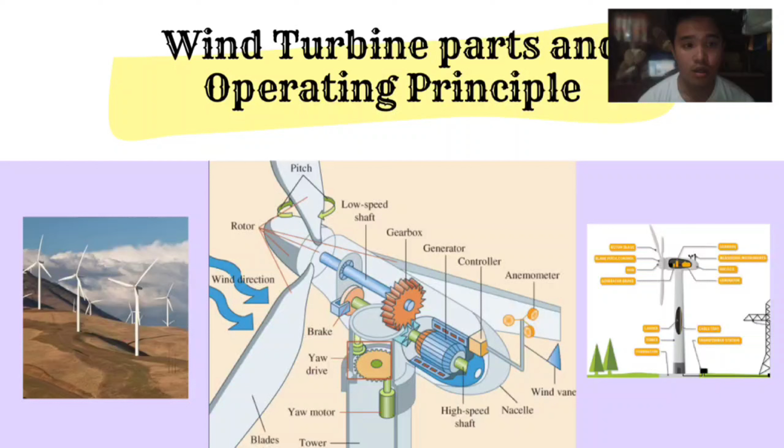And so that we can better understand the functionality and the proper arrangement of our parts in the wind turbine, it will be discussed by my co-members.

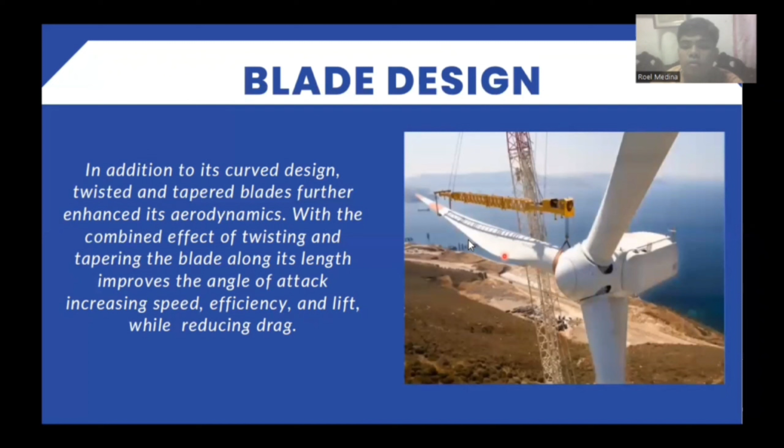Blade aerodynamics. Wind turbine blades work by generating two aerodynamic forces: lift and drag. This is due to the wind and their airfoils. The lift force is perpendicular to the airflow and is in line with the blade rotation. While on the other hand, the drag force is in the line of apparent wind direction, which means it opposes the wind direction or the blade motion. And the drag increases in proportion to the frontal area of an object facing the wind.

And both of these arise from the difference in air pressure across the two sides of the blade, which creates both lift and drag.

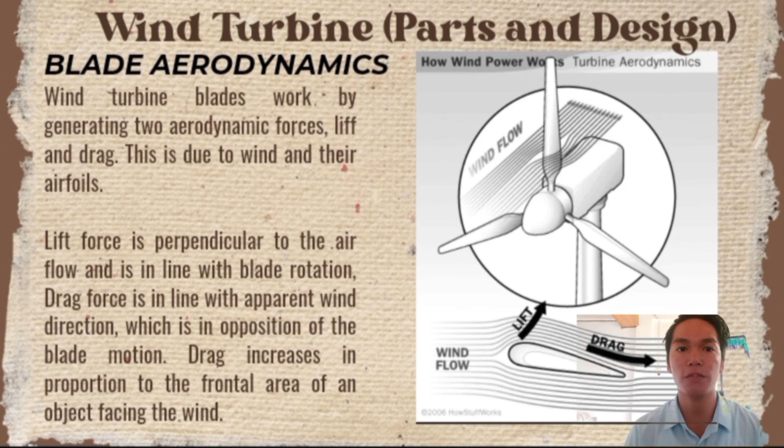And here we can see the lift and drag formula, which, I won't explain this too much, but you can see in the picture the angle of attack, relative wind, center of pressure, and the equations. So in those equations, the lift equation and the drag equation: lift, or capital L, is equal to the lift coefficient C sub L, times the density rho, times velocity V squared, times the area A sub B, over 2.

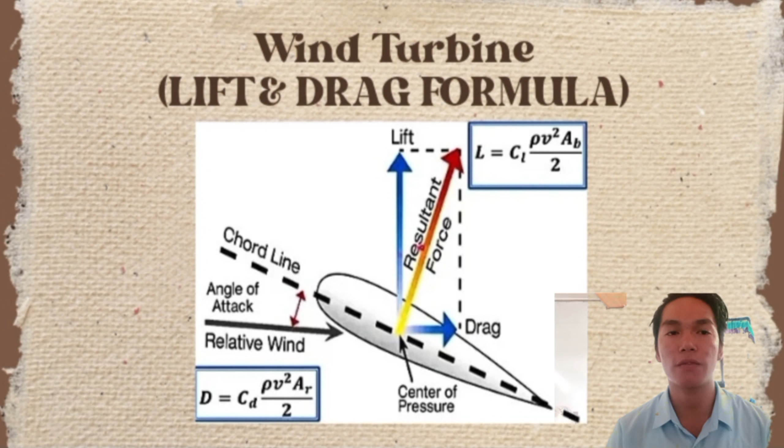It's the same for drag force, with the same value structure. Another thing is that the airfoil is able to make the blade attain the difference in pressure on both sides, which I mentioned earlier. The most curved side, or we may say the convex side, will generate low air pressure, and the high pressure air pushes on the less curved side, or the slightly concave part. This is the actual reason for the blade rotation.

And actually, if the force of the lift is stronger than the drag, that will cause the rotor to spin.

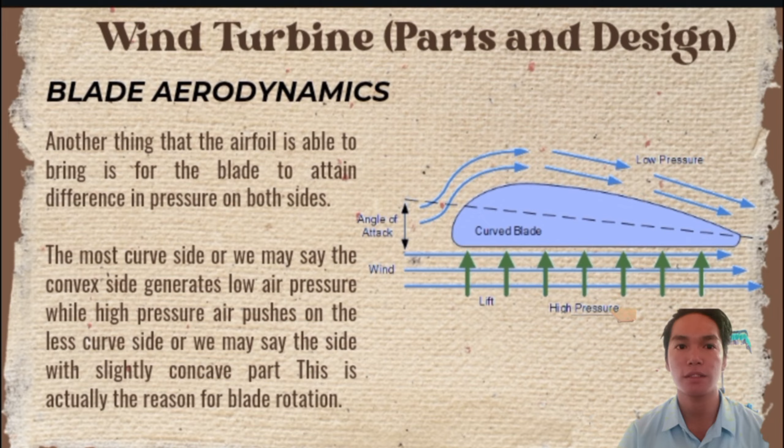Next slide, meron naman tayo ditong blade wind orientation. Here's now the question. Based on the figures, state the optimal angle of attack. Well, yung angle of attack, yan yung angle at which the relative wind meets the airfoil. And it's an angle formed by the chord of the airfoil and the direction of the relative wind. So, yun.

And dito, may tanong dito. Which part of the blade is the leading edge and the trailing edge? Front and back. So, yung leading edge is the part of the blade that is first hit by the wind in normal operation. So, itong leading edge is usually mas mataba, fatter than the trailing edge, and typically should be smooth with no imperfection. While the trailing edge naman is the end of the airfoil. It is usually the knife edge of the blade.

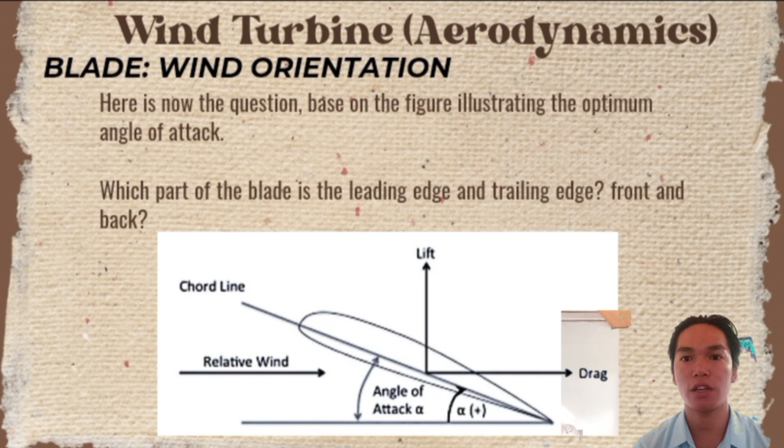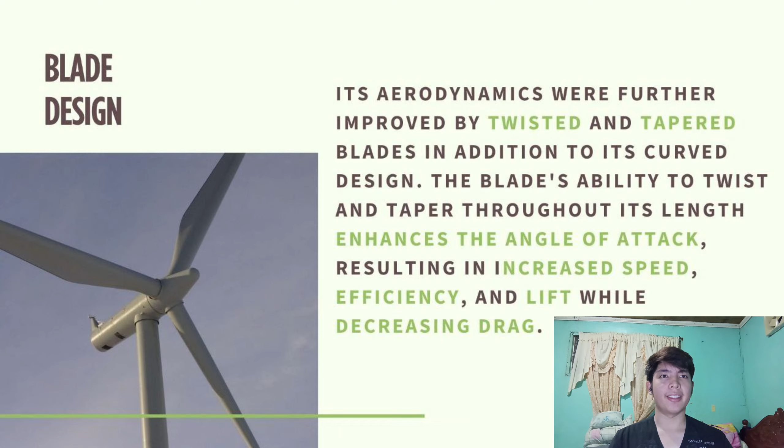Turbine number of blades. So let's start. So wind turbine, we already know that the front of the blade is curved more than the rear. This varied shape causes a pressure differential when the air moves across the blade, which is what causes the blades to move. So dito, ang sinasabi lang dito ay yung more curve daw is yung nandun sa front and yung less curve is yung nasa likod.

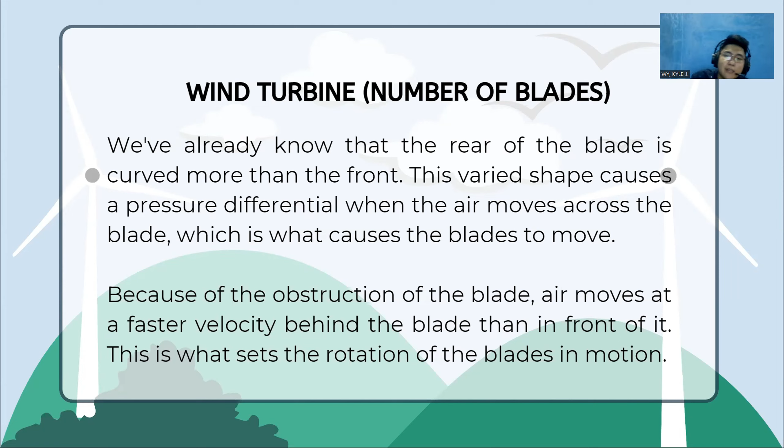Engineers must consider speed and drag in designing the blades to ensure the highest level of efficiency. For example, if too much drag is created by the obstruction of the blades, the power yield will be a lot lower. If not enough drag is created, the blades could move too quickly, causing them to break the sound barrier. So, sinasabi lang dito na as engineers kailangan natin i-balance yung speed tsaka yung drag. Speed or lift force and yung drag force nito.

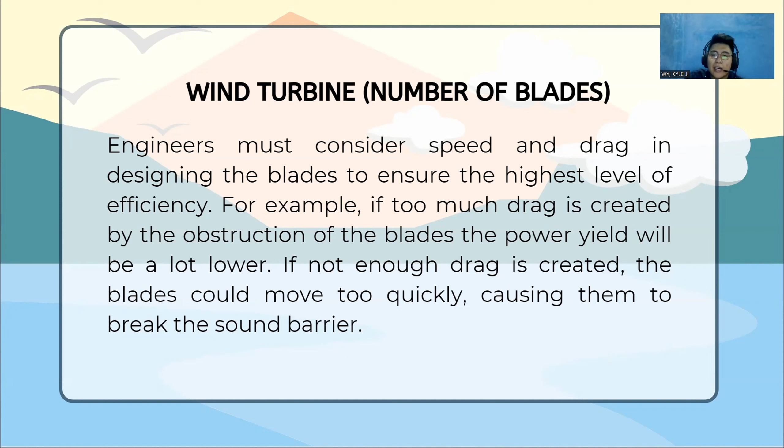So, the rule of thumb. So, eto naman yung rule natin sa paggawa ng wind turbine. So, the fewer blades, the better, since there will be less drag and an increase in efficiency. So, ayun nga na pagka daw fewer yung blades natin is less drag siya. So, mababawasan yung pagbagal and magi-increase siya sa efficiency. So, ibig sabihin, mas magiging okay yung rotation niya.

So, next naman, the number of blades increases the torque and reduces the optimum rotation speed.

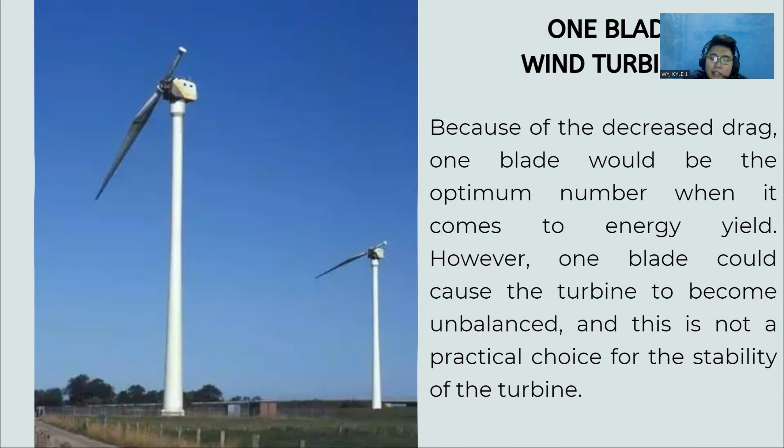So, next is the two-blade wind turbine. At first glance, a two-bladed turbine seems like the optimal configuration for a wind turbine. Perfectly balanced and with one blade less than a three-bladed turbine, they will generate less drag. So why aren't all turbines made with two blades?

So it has troubles in yawing. Yaw is when its head or nacelle turns to face the wind due to the effect called gyroscopic precession. When a two-blade turbine yaws, it creates a wobble as the blades go from the vertical plane to the horizontal plane, which places additional stresses on the mounting bearings, wearing them down faster.

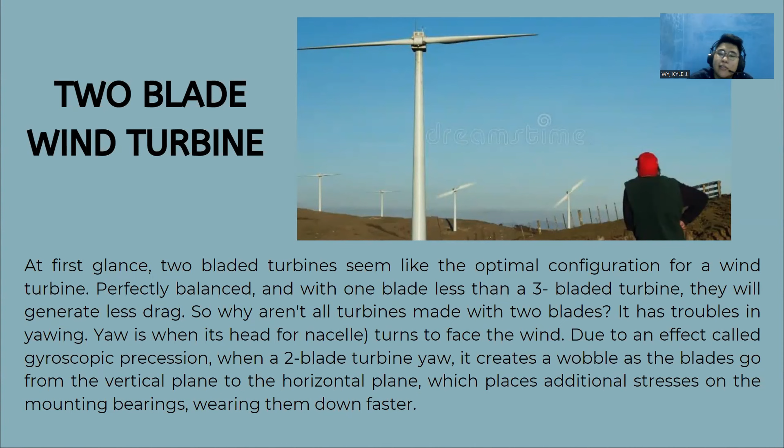So, next naman, more than three-blade wind turbines. Any number of blades greater than three would create greater wind resistance, slowing the generation of electricity and thus becoming less efficient than a three-blade turbine.

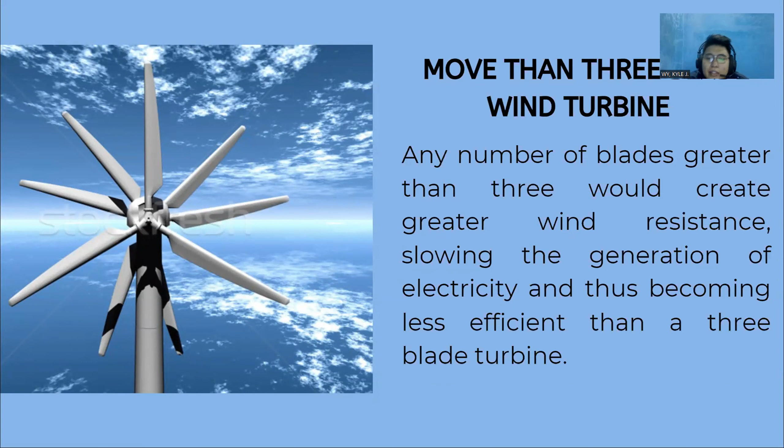So, here we are at the three-blade wind turbine. For these reasons, turbines designed with three blades are the ideal compromise between high energy yield and greater stability and durability of the turbine itself.

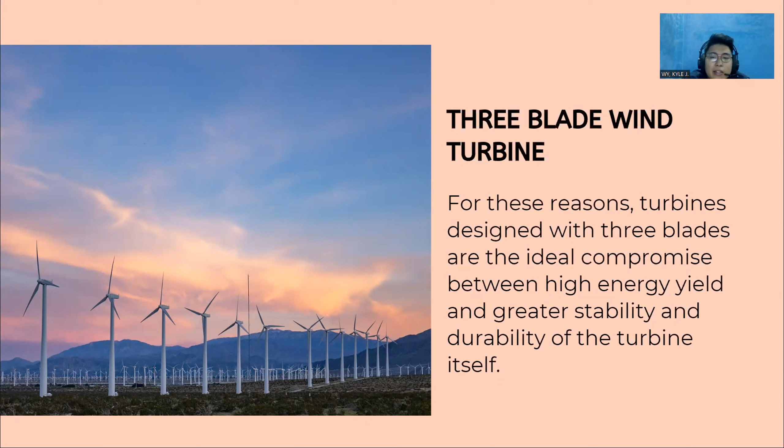So, let's proceed to blade tilting mechanism. So, according to the wind speed, the relative velocity, angle of the wind also changes. The blade tilting mechanism is sensor-coupled parts of the wind turbine which tilts the blades and guarantees proper alignment of the blades with the relative velocity, so that its position is always at the angle of optimum attack.

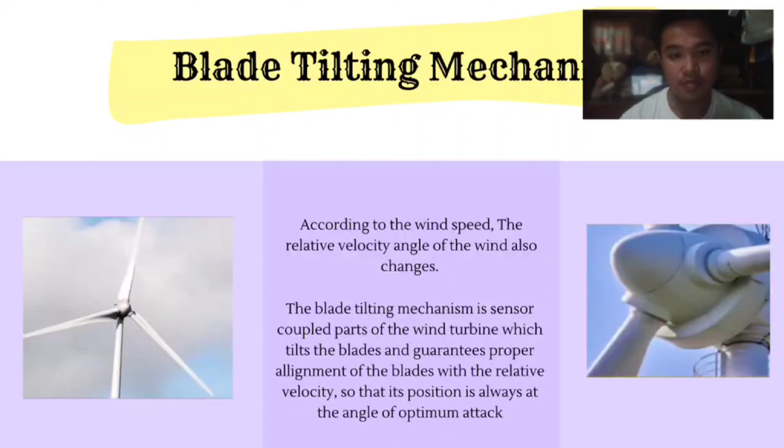And then next is nacelle. The nacelle sits atop the tower and contains the gearbox, low and high speed shafts, generator, and brake. Some nacelles are larger than a house, and for a 1.5 megawatts geared turbine can weigh more than 4.5 tons.

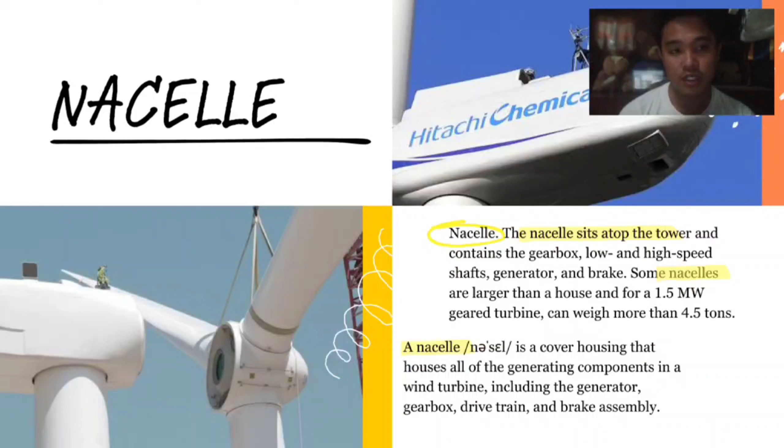Gearbox, the component which converts the slow rotation of the blade into faster speed. This is needed simply because the rotation of the blade generated from the force of the wind is usually not enough for the generator to achieve a grid quality voltage output.

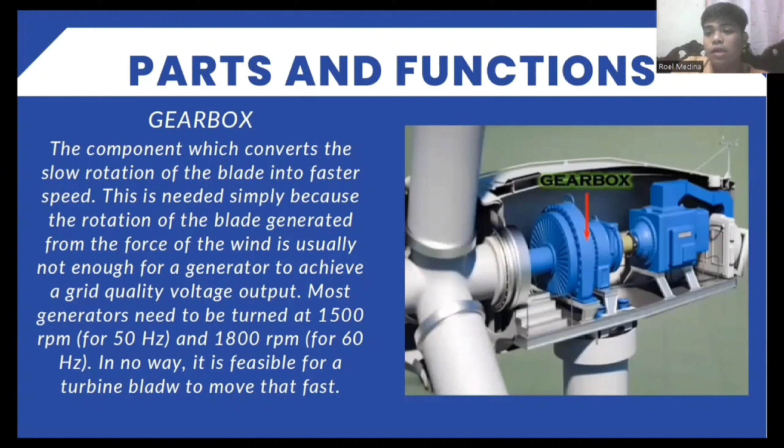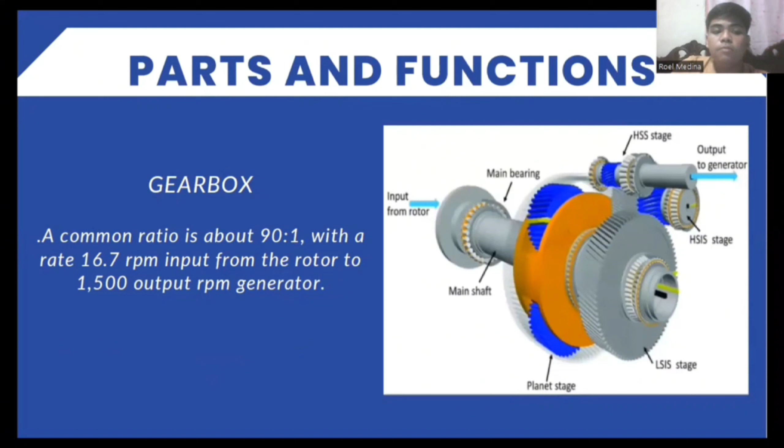So, next. A common ratio is about 90:1. That's what I said earlier. With a rate of 16.7 RPM input from the rotor to 1,500 output RPM generator. So next, alternative design, direct drive gearless. In a direct drive turbine, there is no gearbox. The main shaft spins the generator directly, causing it to spin at the same speed as the turbine blades.

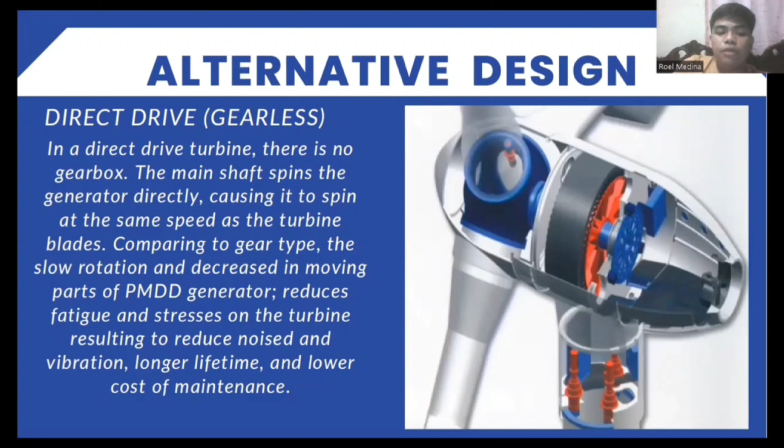Comparing to gear type, the slow rotation and decrease in moving parts of PMDD generator reduce fatigue and stresses on the turbine, resulting in reduced noise and vibration, longer lifetime, and lower costs of maintenance.

One main disadvantage of PMDD is that to make up for its lower rotation, more magnets are added to create the required frequency and power. This increases the diameter of the generator, which makes it larger and often heavier than gear type wind turbine. Another thing is that the additional magnets being used in this type are made of neodymium, which is expensive.

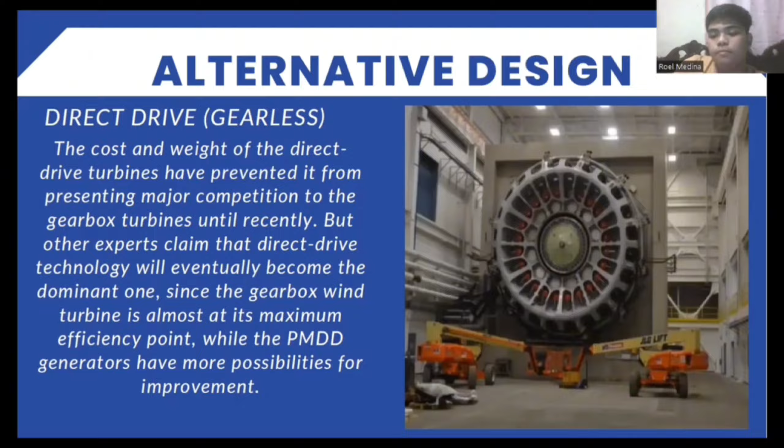Brakes. The brake system in a wind turbine is a protective device coupled with sensors which automatically stops rotation of the blade whenever it detects activities that could harm the system.

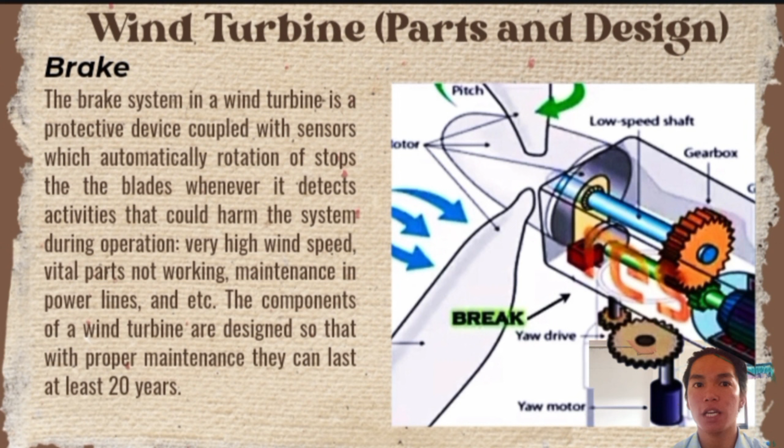Next is the yaw system. The yaw system is a sensor-equipped machine consisting primarily of yaw motor, yaw drives, and others. Its function is to automatically rotate the nacelle on top of the tower so that the set of blades is facing the wind directly at all times. And it detects the direction through the electronic information being fed by the wind vane located at the back. This ensures that the wind turbine is producing the maximum amount of

electrical energy. And sa madaling salita, yung yaw system is comprised lang yan ng motor tas yung drive. Yung main purpose niya is to move the nacelle and blades according to the wind direction. And during the nacelle movement, a fair chance of cable twist occurs inside the tower. And it enables the wind turbine to capture the maximum available wind. Like na sabi ko kanina.

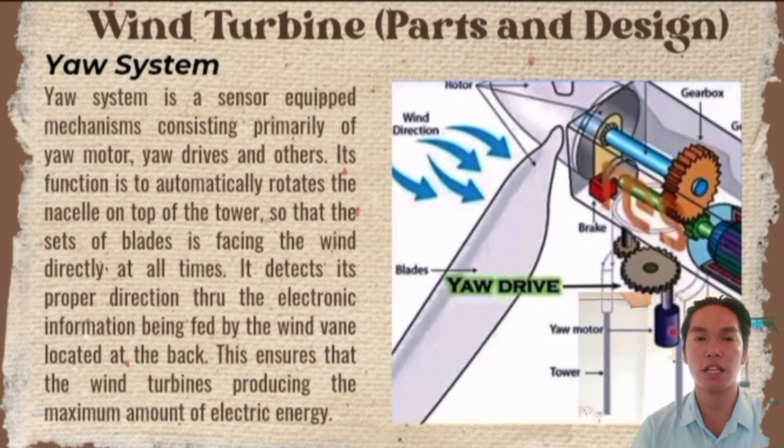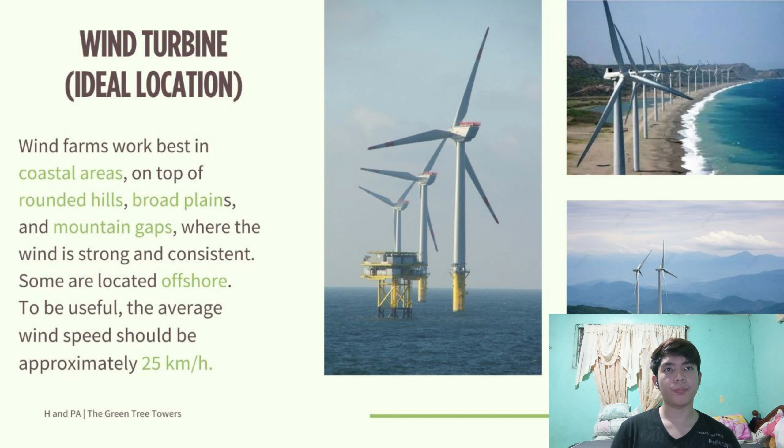Now let's proceed to the disadvantages. For the disadvantages of wind turbine, number one is the wind is unpredictable. It changes speed throughout the day and from season to season. Number two, suitable areas for wind farms are often near the coastal area where the land is expensive. Number 3, can affect television reception in nearby places.

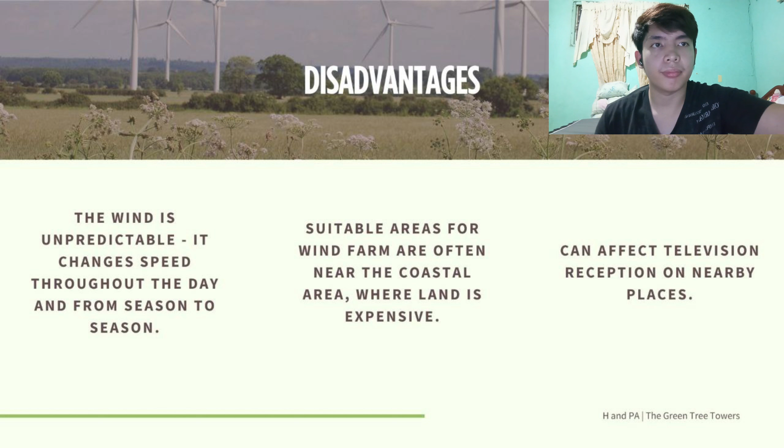So here are the largest wind farms in the world. The first one is the Gansu Wind Farm, which has the capacity of 7,965 megawatts, projected 20,000 megawatts, in the country of China. The next one is the Alta Wind Energy Center, which has the capacity of 1,548 megawatts and its projected capacity is 3,000 megawatts. It is found in California, USA.

Next is the Muppandal Wind Farm, which has the capacity of 1,500 megawatts and it is found in the country of India. The fourth one is the Hornsea Project 1, which has the capacity of 1,218 megawatts in the country of UK.

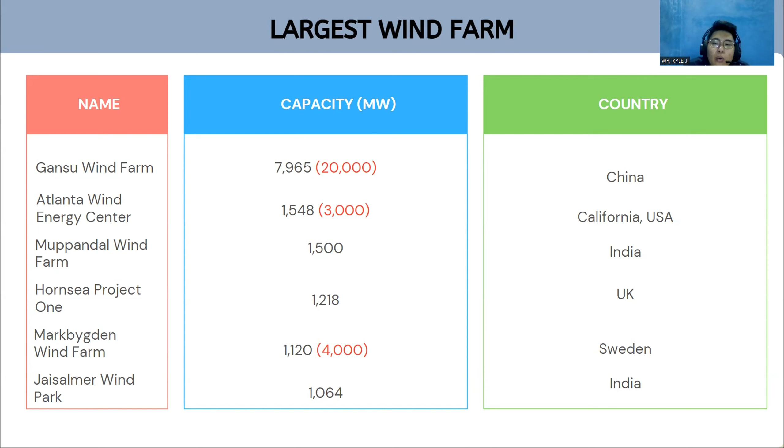The fifth one is the Markbygden Wind Farm, and it has the capacity of 1,120 and it is projected to have a capacity of 4,000 megawatts in the country of Sweden. And lastly, the Jaisalmer Wind Park, it has the capacity of 1,064 megawatts in the country of India.

So now we have the Gansu Wind Farm. As for the last slide, the Gansu Wind Farm is the biggest wind farm in the world. So let's proceed to the details of the Gansu Wind Farm. The Gansu Wind Farm project or Jiuquan Wind Power Base is a group of large wind farms under construction in western Gansu province in China. In 2008, construction began on a 750 kilovolt AC power line to carry electricity from the wind farm, and construction of the wind farms themselves started in August 2009.

In November 2010, officials announced the completion of the project's first phase involving the installation of over 3,500 wind turbines with an installed capacity of approximately 5,160 megawatts. It has an estimated cost of 120 billion Chinese yuan or 17.5 billion dollars. The project is being built by more than 20 developers.